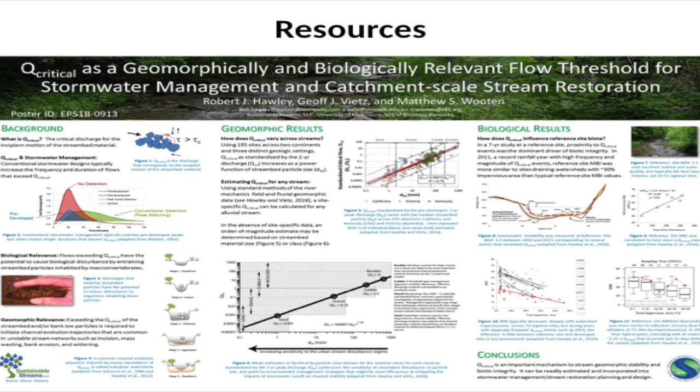So anyway, the meat of how you do it is described in those papers and so forth. But another resource is these, they call them infographics, but basically this is just a poster. This presentation is like 2 hours. This poster is kind of a summary of all the high points. So that's like an 11 by 17 that you could walk away with if you wanted it. So just shoot me an email if you're interested in something like that, or check out our website.

So to begin, conventional stormwater management and stream health. It's no surprise that when you take a forested watershed, and you take the trees away and replace them with houses and streets and such, when you look at the biological richness of the streams that drain those lands, they tend to be much different than the richness of streams in an undeveloped forested watershed.

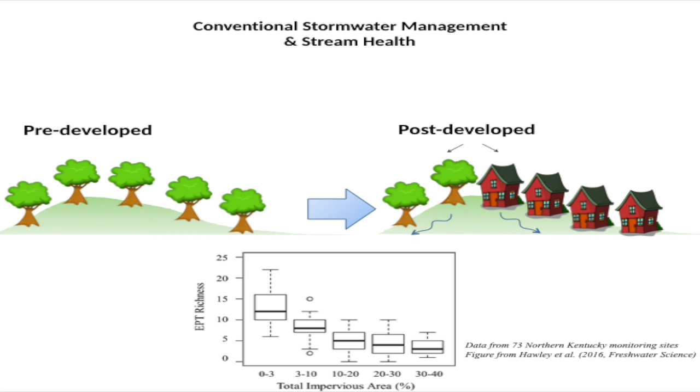And so these data are from Northern Kentucky, and I don't know if you'll be able to see this too well, but you see this shape, right? Kind of a steep drop off. So this is basically impervious area, and this is called EPT richness, but it's basically a measure of stream health. So this is the diversity of sensitive species in the stream. And basically, after you get 3% impervious, you go from having a mean of about 12 sensitive species of these groups, ranging from about 6 up to 22 or 23, right?

So a really nice range of diversity in these undeveloped watersheds, and you immediately drop lower once you go to 3 to 10% imperviousness. So 3% imperviousness is not very much. I mean, that's a few large lot scale developments in a big watershed. And Curry's Fork has a lot of watersheds and subwatersheds that are above that 3 to 10% range. They're definitely above the 0 to 3% range.

And then once you get above 10%, we kind of bottom out. And 10% imperviousness, again, is not very urban, right? It's pretty much suburban, and not even dense suburban. It's more like large lot size development. Very similar to the Oldham County development. And these data are from 73 sites all across a 3-county area in northern Kentucky, with a big range in imperviousness from 0 to 40% impervious.

But the key here is these streams have a variety of stormwater management in their watershed. So from basically no control, no stormwater controls other than just getting rid of the water, to pretty modern stormwater controls. So flood control detention, and even what's called water quality detention, so water quality volumes. And we still see this drop, right? So we don't necessarily see the stormwater controls that we're investing in actually protecting our streams and preserving the richness there. And this is not unique to Northern Kentucky.

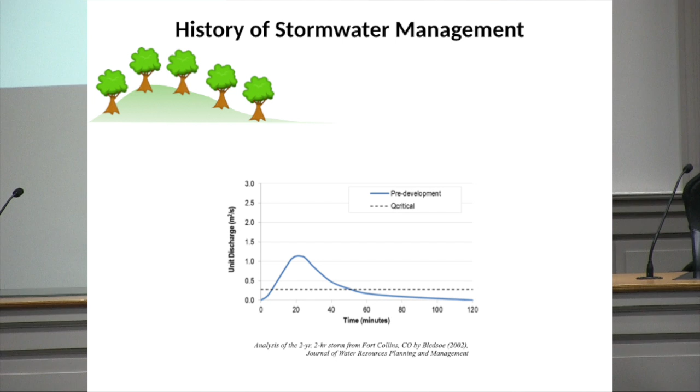So here's a hypothetical 2-year discharge from a 2-hour design storm. This is time on the horizontal axis, and the discharge of the flow on the vertical axis, and we'll call this the pre-developed flow regime. Under pre-1950s even to about the 1980s or so, the development approach was basically get rid of the water, right? So put some houses down, put some roads down, and get that water away from those houses and roads as quickly and efficiently as possible. Get it routed to the nearest stream, and we've got the water away from the people. We don't have mosquitoes and diseases and all those things.

Life is good, right? But what we know, even in areas with clay soil, like Oldham County and a lot of Kentucky and this whole Midwest region, subsurface soils are clay. They don't let a lot of infiltration through. But even that topsoil layer, and the trees with the interception storage in the leaves, that shallow infiltration, even that is a lot less runoff than pavement and rooftops.

And so you see a much larger volume of water and a much higher peak coming from the post-developed regime, right? And send that water downstream, and guess what? More water. Those streams had evolved over centuries to handle the flows they were typically used to, and we've just added a whole lot more water to them, and so we see a lot more flooding downstream, right? And engineers see that and they say that's bad, right?

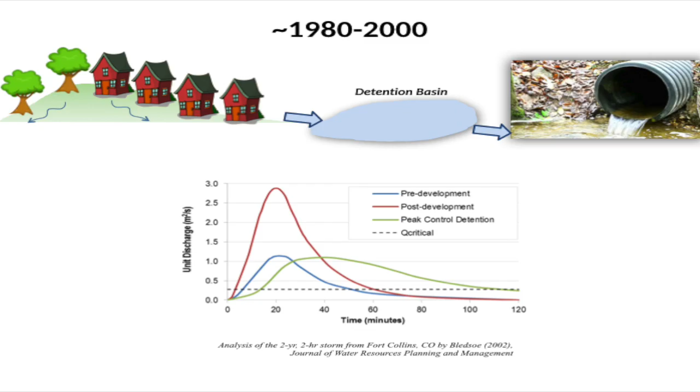And that wasn't a bad start. We don't want to make flooding worse, right? But what you see is we get a lot longer duration of flows that are pretty high. So under pre-developed conditions, the flow came up to this level, and then it went back down. And now we've got this long, drawn-out duration that, you know, it's a change, right? It is a change.

So what you notice if you ever see one of these conventional detention basins, and I do make my kids stand next to detention basins to take pictures. I'm like, hey guys, where's the water? Like it just rained, where's the water, right?

And the reason there's no water in this detention basin is because those detention basins really don't start to attenuate flow until you get to about the 2-year design storm. That's usually about the smallest flow that detention basins are designed to restrict, right? And so you end up with pretty large, what we call low flow pipes that release water from the basin. And those tend to be water comes in, water goes out, right?

And a lot of detention basins, especially in northern Kentucky, have even a concrete channel that connects the inflow to the outflow so that you don't have standing water in the grass. And long story short, what comes in, what goes out on most events in a typical year. And in northern Kentucky, the 2-year rainfall is 3 inches in 24 hours. 3 inches, like think about that. 3 inches is a lot of water, right? A quarter of a foot.

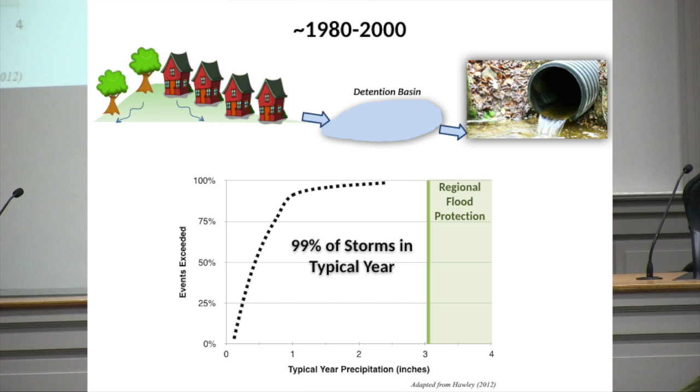And I think Oldham County, Louisville, it's maybe a little bit less than that, maybe like 2.9 or something. Don't quote me on that, but you can look it up. But northern Kentucky's fairly close to Louisville, Jefferson, and Oldham County. But anyway, 99% of the storms in a typical year, basically all the storms in a typical year, are less than that 2-year storm. That's just kind of by definition. The 2-year storm statistically happens once every 2 years. It has a 50% chance of happening any given year. So on a typical year, it's not going to happen.

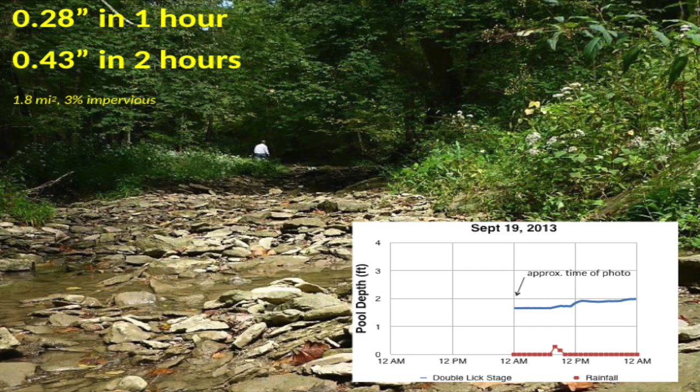And what that is, is the rain hitting the leaves, dripping down from the leaves, hitting the topsoil, soaking into the topsoil, hitting that clay subsurface, and then slowly making its way down to the valleys, right? So about 3 hours later, we get cool, clean water that's just a blip in the hydrograph, recharging base flows. That's what these critters that live in the stream are used to on a 0.3 inch event.

So pretty big difference if you lived along a stream all your life and somebody put a development in upstream, and this is what you see every 0.3 inch rainstorm, versus this is what you're used to, this is what you grew up with, right? So you can see where stakeholders that care about the stream or live next to the stream, have property next to the stream, might say this doesn't seem optimal, right? Can we do better?

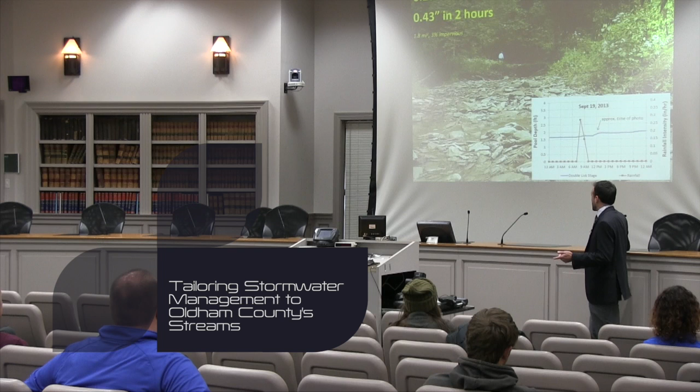The other thing about that first flush idea, about letting water just shoot right through your basin, so what goes in equals what goes out, is all the stuff that it carries, right? So, I personally don't fertilize. My neighbors fertilize. I don't hate them for doing it. You can have green grass. That's fine. I like to pick up after my dog. If you don't want to pick up after your dog and you want to step in it, that's fine too. People can do what they're going to do, but ultimately, if we don't have a way to manage and intercept those pollutants, they're going to end up in our streams. That's just a fact, right?

And a lot of the folks who've been around a long time have seen this. 15 or 20 years ago, we had a big push in Kentucky to get better sediment and erosion control on construction sites, right? And there was a big manual, lots of training, because everyone can say this is bad. Even if you don't particularly care about the streams downstream, no one likes to drive through that. No one likes to walk through that. There's a lot of reasons why stakeholders would say this is bad. It just looks bad, right?

And so we've been improving on our sediment and erosion control on construction sites. We're trying to avoid the milkshake water, as we call it, in our streams. But you can imagine if you're a stream critter and you're used to clean, cool water, and you're getting a bunch of milkshake water from sediment, or fertilizer that's kind of burny. If you're a fish, it might burn you. Or a lot of excess bacteria. If you like to swim in the stream, that's not good. So anyway, we said, that's also a problem.

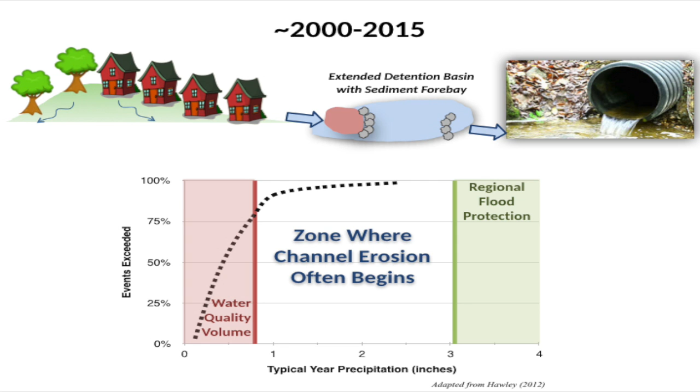So the problem is we've got this gap where above your water quality volume, below your regional flood control protection, stream erosion tends to occur. These sort of high flows that happen 2, 3, 4, 5, 6 times a year get pretty high, right? They didn't used to get super high, but without management, they get a lot higher, and they can contribute to stream erosion.

And so now is a good time to go back to the fundamentals of stream erosion. We call it the critical discharge or the critical flow for stream erosion. People have been studying this since the 50s, so we're going on 70 years of science in this. But basically, for any stream, there is a threshold where once you get to this flow, you're going to mobilize the particles on the bed, right?

If you were a bug that lived on that rock, that could be catastrophic. That could actually kill you, right? You could get crushed. At a minimum, you're going to let go of the rock and try to float away, let the water sweep you away, but that might kill you too. So for the bugs that live on those rocks, that's a big deal. For the fish that eat those bugs, that's a big deal, because that's happening more frequently than it used to.

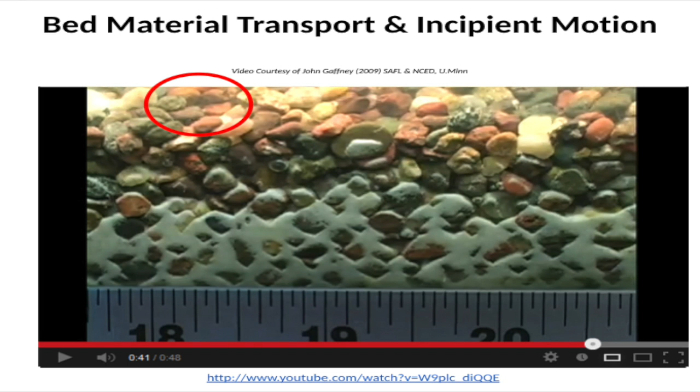But look at this spot right here. It used to have a rock that was up to about here, and now the surface of the rock is way down here, right? So the big deal geomorphically and stream stability wise is the stream just got deeper. By eroding these pebbles more than they used to be eroded, we're making our streams deeper, right?

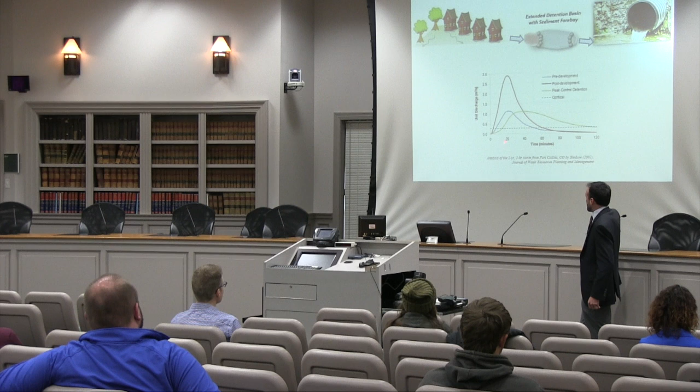And so what we've got with our conventional flood control design, again, this is the 2-year. This is a hydrograph in which the critical discharge is here, this dashed line. So you look at how much power is above the dashed line under the pre-developed conditions, and how much power is above the dashed line under the flood management conditions. And you see we got about 2 to 3 times as much damage being done on the stream than the stream was used to under pre-developed conditions, right?

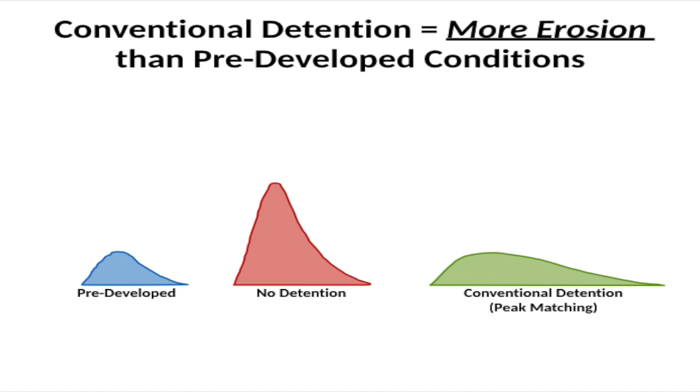So no detention was bad, but conventional detention prolongs that hammering of the stream, right? You got 2 to 3 times the power that lasts 2 to 3 times as long. You're going to erode about 2 to 3 times the rocks. So you do that over and over. Say you get a flow that mobilizes the particles, and then maybe a few of them get replaced, but then you do it over and over and over. All of a sudden, you're going to start getting deeper, right?

And that deepening causes a chain reaction of impacts in our streams, and we'll go to it in the next slide here. But basically, stream deepening and widening, property loss, tree loss, and then of course water quality impacts. So typically, as streams get deeper, they respond in this nature. And this sequence, we've measured it in labs over 50 years of research, but we've also seen this across basically the whole Midwest. This is how streams change when you either channelize them or put a bunch of urbanization upstream.

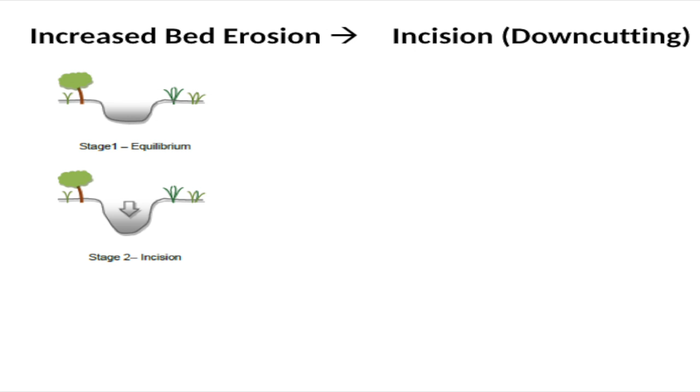And so first, you've eroded the particles that were on the bed right there, so you made your stream deeper. And when you made your stream deeper, that made the banks taller, right? Geotechnical engineering tells you that a taller stream bank, a steeper angle, makes the banks unstable. Geotechnically, they start falling in. So you enter the phase of mass wasting, where the bank is too steep and tall to actually hold itself up, and it fails by its own weight, right?

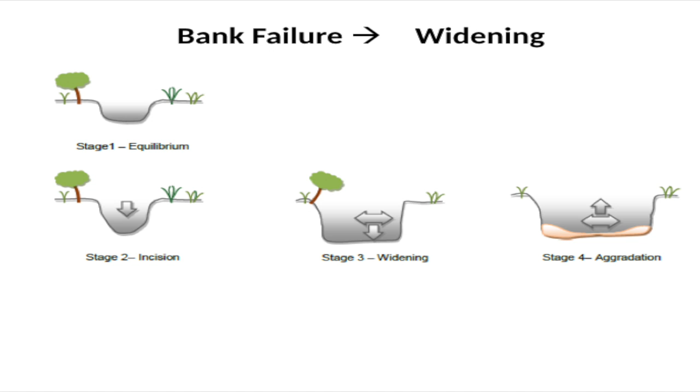So this bank is unstable, and you don't even need more flow to hit it. It can just fail due to gravity, right? And then over many, many years and decades, in most cases, you end up having this unstable bank, and it keeps widening until it gets so wide and so flat that you start to see deposition and aggradation at the toes of the banks, right?

So the stream has responded so much that it can no longer move its sediment on its bed, and it starts to aggrade. And then again, in many cases, years or decades, you see that aggradation become colonized by vegetation. And once you have colonization by vegetation, you start to strike a new balance. We call it equilibrium with the flow regime.

So the stream has become steep enough or shallow enough, or it has become coarse enough that it has been able to reach a new equilibrium with whatever you did to it. So whether that was channelize it, or whether it was add too much water to it, or whatever. And this process happens, again, throughout the Midwest.

And it's actually a really useful process when you're looking at a stream and trying to figure out, like, all right, there's a road right here, and it's in this stage of channel evolution. Well, that road's in big trouble, right? Because this bank is not going to fix itself. Whereas if you're in this stage and you're just starting to see incision in your roads over here, maybe you got a chance of heading that off.

But anyway, this is a kind of a tool that we use a lot when we're assessing a stream. The big point is this is a very predictable trajectory of channel change. Go ahead. What kind of time frame are we looking at from stage 1 to stage 5?

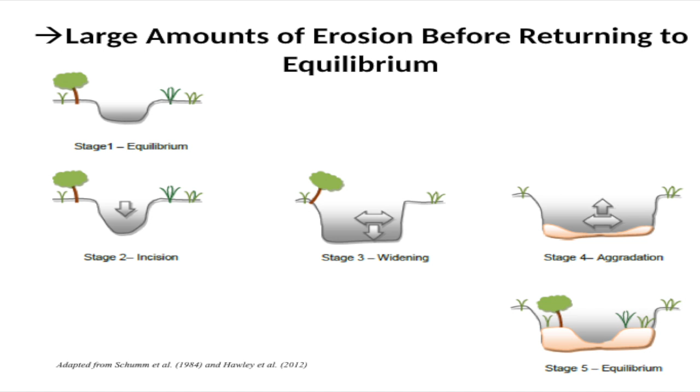That's a great question. So in our Northern Kentucky data, which is pretty similar to here, pretty sticky banks, right? You don't usually see every year you lose an inch of bank. Usually it happens in a big slump. So it could be like this for 3 years, 5 years, and all of a sudden you get a big slump, and you lose like 3 or 5 feet in 1 year.

So we just did a memo for SD1 on this that looked at all their sites over about a decade of monitoring, and their average rates of widening were about 4 feet per decade. So about 0.4 feet per year on average. But again, you don't usually lose 0.4 feet exactly every year. It's more like in a 5-year period, you might lose 2 feet or even 4 feet.

But the range of variability was pretty big. So the average was about 4 feet per decade. But you could go from basically 0 up to like 10 or even 15 feet in a decade, right? So it's a pretty big range.

And then as far as deepening rates, they were more like, I want to say, on the order of about 1 foot per decade or something like that, about 0.1 feet per year. I can send you the actual paper and get the exact rate right. But the bigger point is, this tends to be a long process, right? You need the flows to happen, and these geotechnical failures are unpredictable, and so it tends to be on the scale of decades to working itself out rather than years.

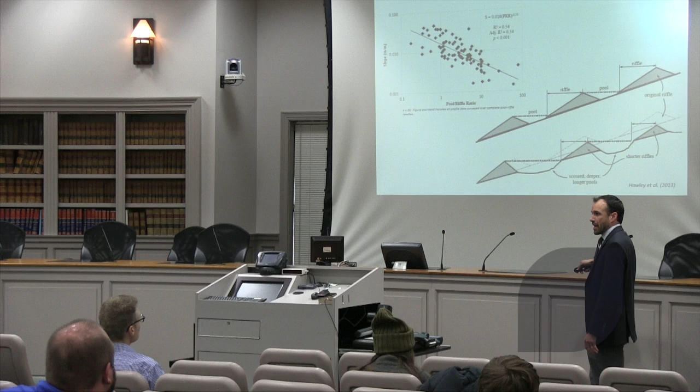So that was a cross-section view, like you're standing in the stream, but this is a profile view, looking at the stream from the side. The point here is, when streams get flatter, they also impact their habitat. So you're not only getting deeper, but if you're dropping less elevation over the same distance, you actually have less room for riffles. And riffles are the shallow, fast flow areas that you see in a stream where the water's kind of ripply.

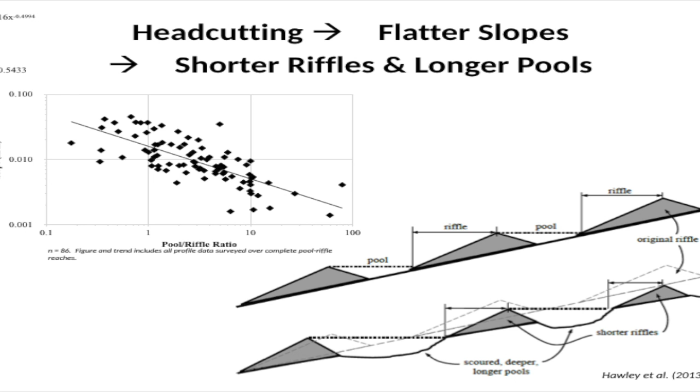And the reason that's important is there's a lot of taxa that evolved to live in those riffles, right? If you've got a nice diverse stream, you've got some species that like pools, and some species that like riffles. And if you've got less and less riffles, then you're going to have less and less of those sensitive species that like the riffle habitats, which is another indicator of poor biological health. So just by the nature of eroding all the pebbles that can form the riffles, you're losing your riffles.

And then, of course, bank erosion. Nobody likes that. That's what we were just talking about. This is eating up a fence. Lots of sediment coming off this bank. And this stream has eroded through bedrock. We have a lot of streams on bedrock here in Oldham County. And the problem with streams on bedrock is once the bedrock is exposed, it actually weathers a lot quicker than if it had a layer of pebbles on top of it, right?

So as you have exposed bedrock, that starts to weather, and then if you eat through that layer of bedrock, a lot of times what's beneath our limestone is another 4 or 5 feet of shale. So then you can go from having a pretty shallow stream with decent connection to the floodplain to, all of a sudden, 5 feet deeper, in a matter of decades rather than centuries. So that's not a good process either.

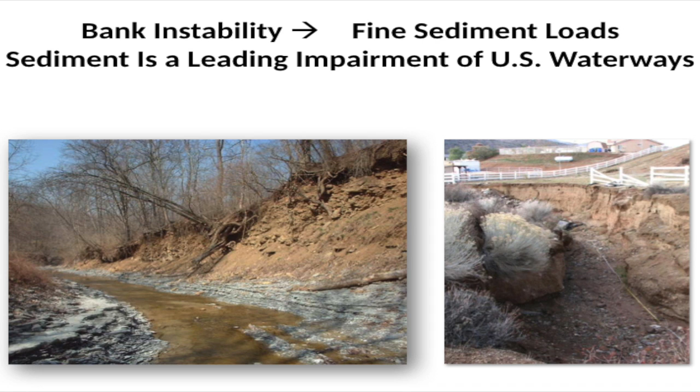But in terms of water quality and Division of Water's interest and Congress's interest, sediment is a leading cause of impairment in our nation's streams. It's actually the leading cause of impairment in, I want to say, Kentucky and Ohio. If it's not the first, it's the second. Usually sediment and bacteria are right up there. And we know from intuition, that's a lot of sediment, right? But we also know from a lot of data that a lot of the sediment in our waterways comes from bank erosion.

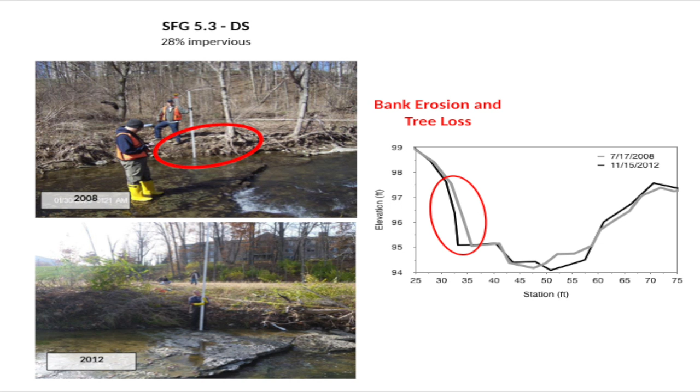But this 3 feet of erosion at that stream, and all the other rates of erosion we measured at our other sites, if you project that out in terms of a load, what you end up with is that the amount of erosion we've seen at our stream banks explains 100% or more of the sediment in our water.

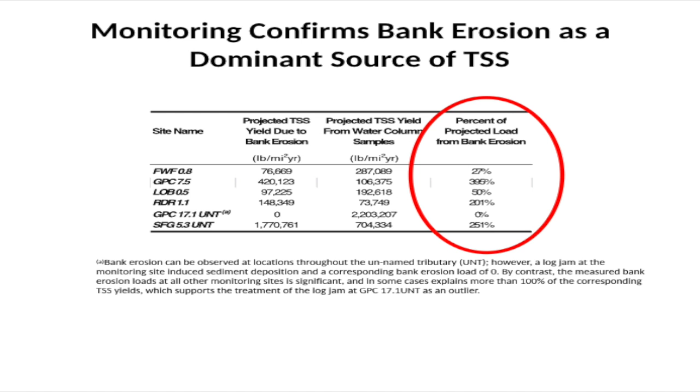The sediment that we measured in our water, we've got 100% of that can be explained by just bank erosion. It's not to say that that's the only source of sediment in our water, but it's saying bank erosion is so high that all of the water column sediment could be explained by bank erosion. We probably have some construction site runoff, some coming from that. We probably have some other sources, but in general, our bank erosion rates are high enough to explain a lot of the sediment in our water. Number 1 pollutant in our streams.

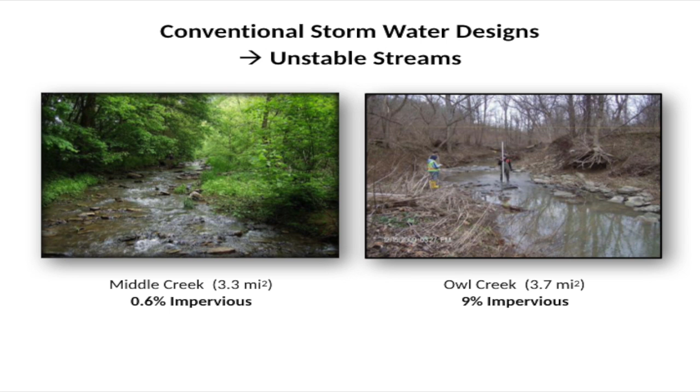So here we go. This is kind of a picture speaks 1,000 words thing. Two watersheds, similar sizes. This is a reference site with very little impervious area, less than 1%. Here's a lightly developed watershed with 9% impervious. And you can see the difference. And just so you know, I'm not cherry picking because this is a nice summer picture and this is a terrible winter picture with no vegetation. You can imagine this tree didn't choose to grow like this, right? There used to be a bank here, or the bed used to be a lot shallower, because those roots didn't choose to be exposed, right?

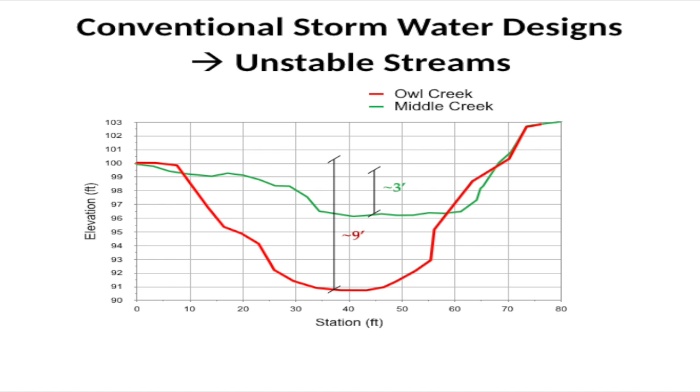So here's their actual cross sections, right? About 3 feet to the floodplain for Middle Creek, about 9 feet to the floodplain for Owl Creek. 1% impervious versus 9% impervious. So those are real differences, right? Unstable streams impact resources and waste money, again, impacting property. Lots of infrastructure along these stream valleys, right? So lots of sewers end up getting exposed.

So, we all drive on roads, right? Unstable streams are not good for roads, right? So the point is, the conventional management is pretty unsustainable for not only our streams, but also our infrastructure and our societies. So how can we optimize that to be a lot better, right?

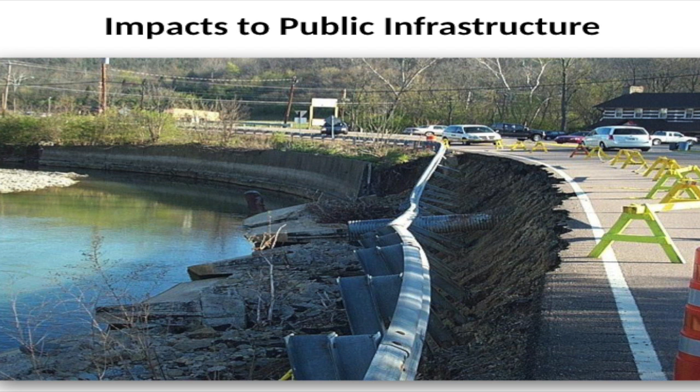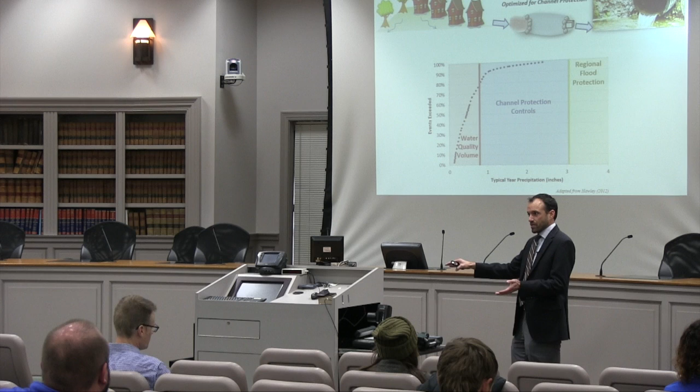And so the future of stormwater management, not only here but across the globe, is really paying attention to your stream to figure out what flows erode your streams and making sure that post-development you're not making that worse, right? And so you figure out what that critical discharge is for your stream or your region, and you make sure that each storm that exceeds that, you're not exceeding it at a larger peak or duration than was happening under pre-developed conditions.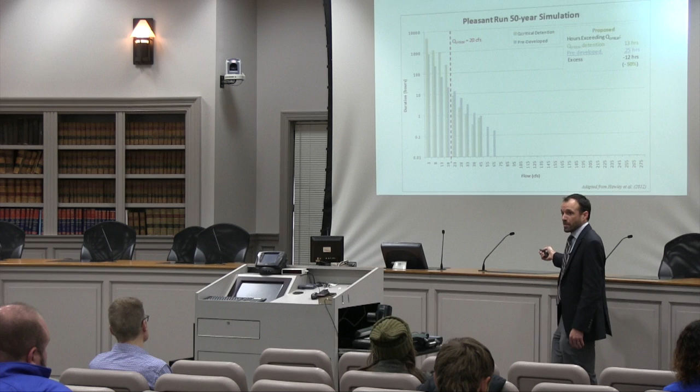So we're still exceeding Q critical. See, the green bars still exceed. We still have a few minutes at 38 CFS, but it's not more than an hour at 38 CFS over that 50-year period. Same for all these other flows that exceeded Q critical, right? So that's the idea that Q critical gives you, we call it the safe release rate. And if you can do that over a 50-year simulation, 20-year simulation, over the long term, you're not going to have any more damage, any more erosive power in the stream after development than happened before development.

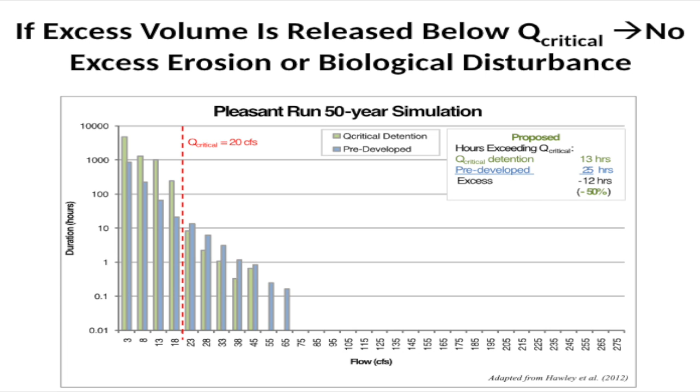So if Q critical is that important, obviously, we got to figure out what it is, and it's clearly not one size fits all. Right, and again, we've been studying this for about 70 years. But again, you can just use your intuition. I mean, the flow that erodes a boulder is much different from a flow that erodes a cobble or a gravel or sand, right? And so here's a particle diameter on the horizontal, and then the depth to mobilize that particle if you're in a stream. And these are different slopes, right? So let's just look at 1% slope, right?

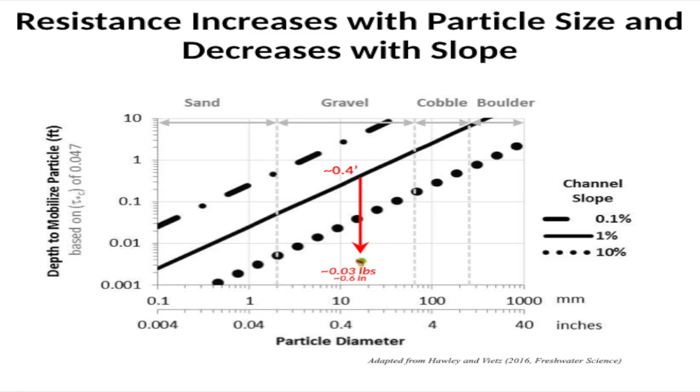1% slope. If you have a marble, let's see, I got my prop here. Marble this big, right, on a 1% slope, so you're falling 1 foot over 100 feet, right? You only need about a half a foot of depth to mobilize this marble, right? All right, so not a big flow, right? If you have a golf ball, so if the golf ball was a rock, we're still in the gravel range, it'd be about 0.3 pounds, and you would need about a foot of depth to erode stream particles like this on a 1% slope.

I'm going to trip on that.

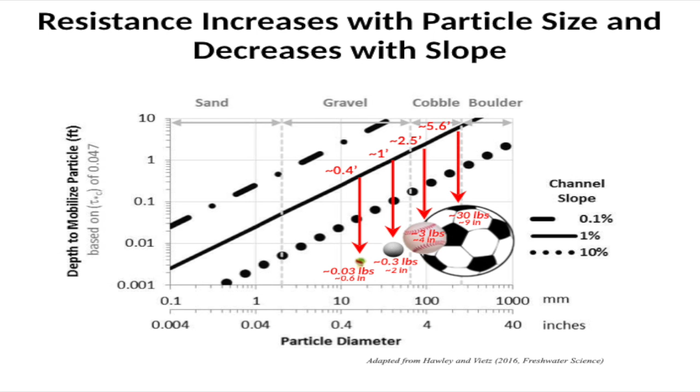If you had a softball, so I mean, we're getting bigger now. We're in the cobble range, right? This is 2.5 feet, so we're getting deeper to erode this on a 1% slope. And then if you are a soccer ball, much bigger, right? 30-pound rock, right? On a 1% slope, you got to be basically as deep as me, right? You're nearly 6 feet of depth to erode particles this large, about 30 pounds, if it was a rock, right? On a 1% slope. So again, this is stuff that we've been measuring in a lab for 70 years.

It makes intuitive sense, but it matters how big your particles are at your stream sites. We've been studying this in Northern Kentucky for a decade or so, and it takes basically counting the rocks and measuring the particle sizes on the stream bed to figure out how big they are, how heavy they are, what's the flow that's going to cause erosion.

And you typically need to do this at a lot of sites, and particularly the sites that are not developed, your more reference sites, to figure out what is that Q critical for the regionally representative pre-development target that you'd like to have.

And one more thing for the biologists and ecologists in the room. So I've been talking a lot about stream erosion and engineering and river mechanics, but Q critical is even important at our reference sites. And you can see that not only in the geometry of the stream, but in the bugs. So here's a reference site with perfect habitat, perfect water quality, great undeveloped flow regime. It's forested and hayfields upstream.

There's no development upstream. And in 2011, we saw 4 events that exceeded Q critical, right? And normally we get like 1 event that exceeds Q critical in a year. And so our cross section got about 30% bigger between 2010 and 2011. And our bugs went from basically excellent to poor, right? These are all measures of biological health, and here's our 7 years of data at this site.

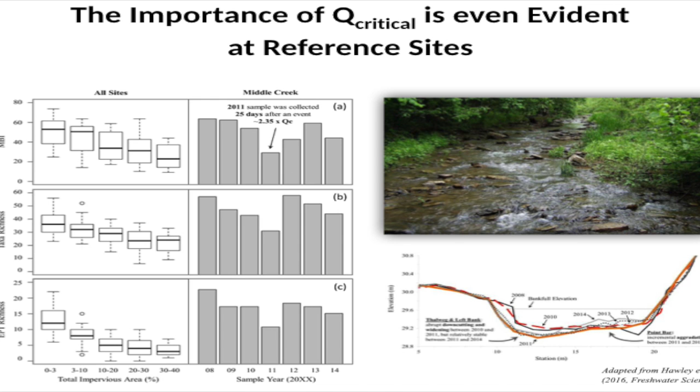The difference is, at a developed site, you're getting hammered every year if it's conventional management, whereas at the reference site, we bounce back immediately. The bugs bounce back when the weather goes back to normal, and that's a dangerous phrase these days, but when the storms were less erosive the next year, we saw recovery in the bed, and we see recovery in the bugs. So here's another way to look at it.

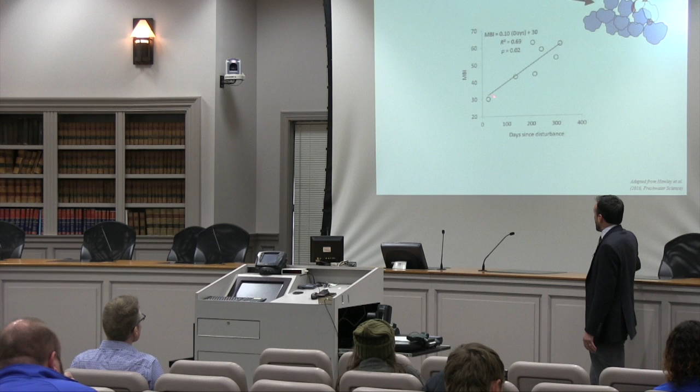This is basically stream health versus the number of days since a Q critical disturbance event. And you see here in 2011, we had a disturbance event really close to the sample date. Our bugs were terrible. And the more days you have to recover, the more days for the rocks to be stable and be recolonized by the bugs that are still there, the better the biological health is. So increasing biotic integrity versus increasing recovery time.

It's the same for channel enlargement or geomorphic recovery. So the closer you are to a Q critical event, the more channel enlargement you see, the more difference you have between last year's survey and this year's survey.

But the further out you are from a Q critical event, the more time that channel has to recover on its own, using vegetation, the roots, to restabilize and things like that. Go ahead. Are you saying on that undisturbed stream, that was all a natural occurrence? That's right. It was just the weather.

Yeah, so we have a whole paper about it that kind of shows you it was 4 events that exceeded the critical discharge, and one of them was, I want to say, 2.5 times the critical discharge. So those were more frequent and larger Q critical events, but they were not affected by development. Let's say that. It was the weather doing it, not anything else. There were no other factors.

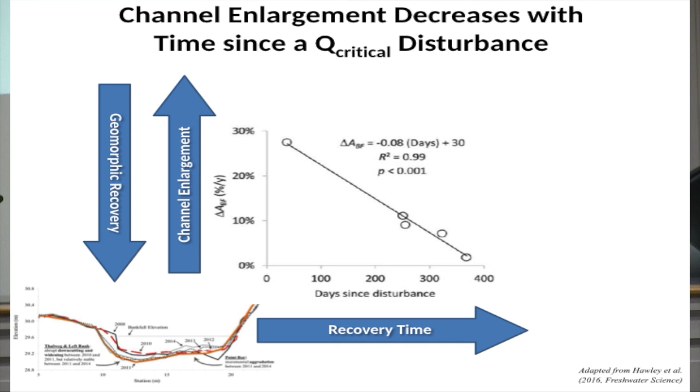So are you trying to prevent what normally would happen there, or are you just using that as a base? That's exactly. So under normal conditions, if your stream has erosion sometimes, naturally, then the bugs that live there and the fish that live there depend on that. They just depend on it to be that natural frequency, right?

And so when we disturb them too frequently, we kind of end up in that cycle of channel evolution where instead of restabilizing, the rocks filling in from other rocks, the vegetation colonizing bare spots, the bugs coming back, because we've had a lot of days between disturbance events. If you disturb them 3, 4, 6 times a year instead of maybe once a year, then you start down this cycle of degradation that ends up lasting a long time. Go ahead.

Can you just talk a little bit more about the recovery and what all goes into that? Like the channel eroding, for example. What occurs during recovery to make that go back to something close to what it used to be? Yeah. So what you see here in the red line is 2010 and the orange line is 2011. So that got deeper, right? And it got deeper across, mainly on this side, right?

But over time, 2012, 2013, 2014, you see this bar building over here, and that bar is getting colonized by vegetation. And basically, if you measure what we call the bankfull area, how big the channel is below the top of the bank, roughly, the area of the 2014 channel is within about 10% of the area of the 2010 channel, the pre-disturbance channel. So incrementally, it's recovering to what it was, because what it was was an equilibrium.

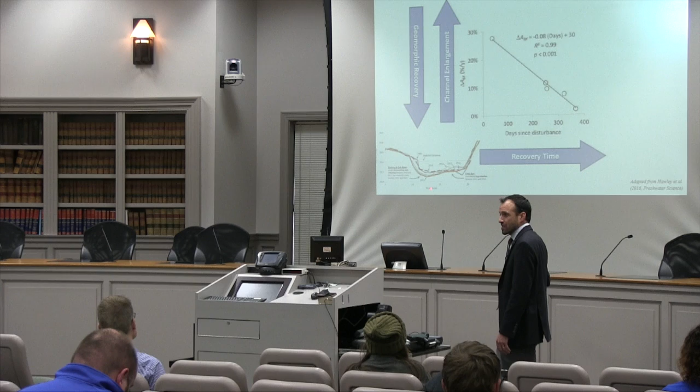In a disturbed watershed with frequent disturbance, you don't have that time for vegetation to colonize this deposition, right? You've got too much energy, so the stream is trying to dissipate that energy by making itself flatter and making it wider. And that's that long process of channel evolution.

Question also. Those 4 storm events you're talking about, what kind of event are we talking about? Is it measured as a 2-year storm, 10-year, something, so you can put it relative to what we're designing to? Right. So you see, this is excellent. This was good. In 2010 it's a little bit worse than 2009 and 2008, and then this is 2011, which was a 40-year event. 2010 wasn't a 40-year event, but it definitely exceeded Q critical, right?

And so the best way to think about this, see this scatter year to year, right? We have lots of sites in the 0 to 3% category here. They're all lumped here. And you see, any given year, we've got a lot of scatter. It could be really great, like here, or it could even be poor. But over time, that reference site is going to be the best that you have.

And so whenever you're doing a sampling program, it's really important to always sample a reference site, because you could be measuring just a bad year, just a bad rainfall year. It could have been a drought that disturbed it. It could have been a Q critical event or whatever. But the reference sites in Northern Kentucky, again, best of the best, these things bounce around from excellent to poor.

But what's interesting, so this is MBI, which is kind of a big aggregate metric of a lot of things that they're measuring in the bug community. But this is taxa richness, and what that is basically diversity. So how many different species you have at that site. And what you see is the year after the record disturbance was our richest year.

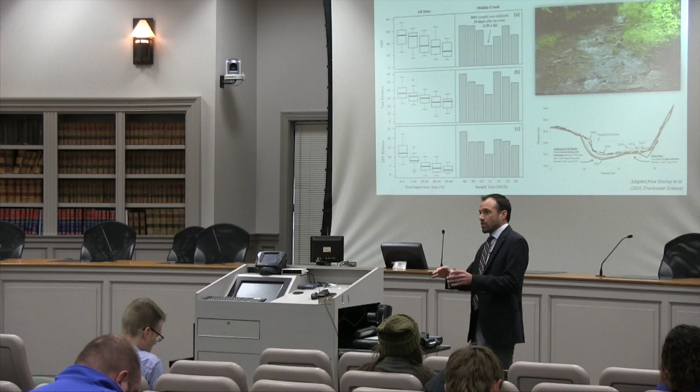We actually need those disturbances occasionally to sort of reset the system, because what happens is if you don't disturb the system for too long, all the weedy species get outcompeted by the longer-lived, more competitive species, right? And they start to kind of knock down your diversity. If you disturb it too frequently, all you have is the weedy species, and those species that take a long time to get colonized, they're not there, right?

And so you get your greatest diversity when you've got that natural mix of infrequent but frequent enough disturbance, basically the natural disturbance regime. And so we're not trying to release all storms below Q critical. We're just trying to not do it more than it happened under pre-developed conditions. And generally, conventional development releases it way more frequently than under pre-developed conditions.

But yeah, all the biologists that I talk to, they get worried about this policy because they're like, well, you're going to over-control. I'm like, guys, if we ever over-control, then let's have that conversation. But we're pretty far away from over-controlling at this point. So anyway, that's a great question.

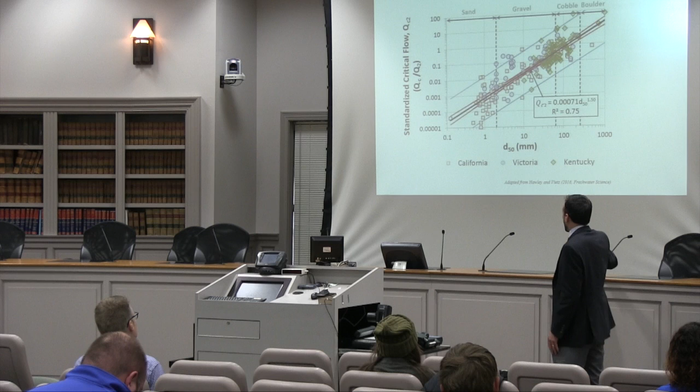So these are data from California, Victoria, Australia, and Kentucky. And what you see is when you take the Q critical for a site and you standardize it by the undeveloped 2-year discharge, you get a really nice relationship across bed material size. The problem is this is a log scale and there's basically 3 orders of magnitude in the scatter, right? And so you really do need to kind of calibrate it to your stream, or at least your region.

And California has got a huge spread. Like these red dots go from basically always disturbed every time it flows to something like 10% of the 2-year discharge, or even 100% of the 2-year discharge.

But in northern Kentucky, our reference sites are telling us that the Q critical value is about 40% of the 2-year discharge. So the gravels and cobbles in our streams in northern Kentucky can hold up to a pretty big flow. Like 40% of the 2-year discharge is, you don't really want to stand in a flow that's big because it might knock you over, right? So we've got some pretty resistant streams in northern Kentucky.

People have used these types of data to sort of come up with regional Q critical targets for their region. So Santa Clara, California was the first to do this. Their systems are a lot sandier. They're more sensitive, so their Q critical was 10% of 2-year discharge. San Diego has classes depending on what kind of stream you're in. So you can be 10, 30, or 50% of the 2-year discharge, depending on if you have a more resistant stream or a less resistant stream. And in northern Kentucky, we have about 40% of the 2-year discharge.

And interestingly, even in bedrock streams in northern Kentucky, what we see is the threshold to basically erode the vegetation at the toes of the bank and on the bars also tends to coincide with that 40% value. So even if our pebbles aren't there, our rates of enlargement still coincide with this 40% of the 2-year discharge threshold. So it's kind of applicable and a good target for lots of different stream settings in northern Kentucky. And in order to try to induce that deposition, keep that deposition stable long enough for the vegetation to colonize it.

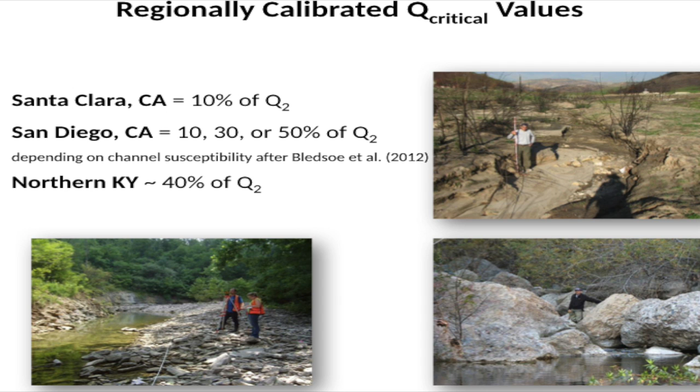There are also stream-specific requirements. So these regional requirements are just saying, here's the development manual, and here's your target, right? And you don't have to go out and actually do anything at your stream. But there are some states and municipalities where they do stream-specific requirements. So New York State requires that on projects draining greater than 50 acres with more than 25% impervious, you basically hire someone like me and they go out and do an assessment of the stream, figure out what that Q critical is, and then tailor the management on each single development, right?

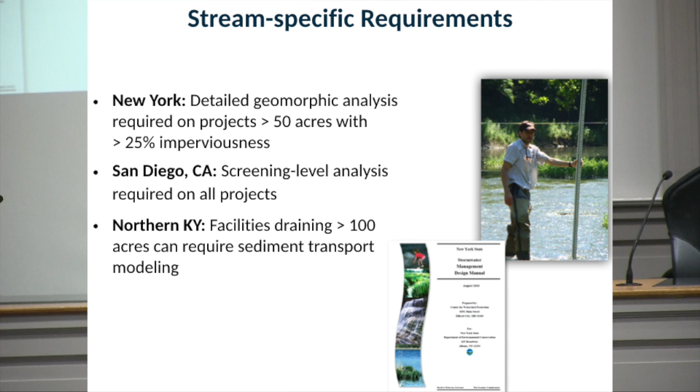San Diego, California has that screening level analysis required in all projects. Some of your more sensitive streams end up requiring some extra analysis. In Northern Kentucky, all it is, if you've got a facility that drains more than 100 acres, you need to probably talk to Northern Kentucky SD1 and basically they'll work with you to figure out what kind of potentially extra modeling might need to be required. But in general, the large majority of development sites do not have facilities draining larger than 100 acres, so they just kind of use that standard 40% value.

So we do all this extra sediment transport modeling on the municipality side, on the research side, to figure out how we can optimize our stormwater rules and regs in the simplest way possible and still get what we want in terms of no extra erosion in the stream, right? And so we use these continuous sediment transport analyses. So this is a top 20 event, so it's the largest 20 storms in the last 20 years.

And what we show, just as an example, is the difference in sediment transport to the pre-developed regime. Under no detention, but post-developed, we've got about 1,000% worse than pre-developed conditions. For flood control detention, we've got about 300% more sediment erosion than under pre-developed. For flood control and water quality, we're still at about 200% worse. But if we add this channel protection control, we're basically right on the money. We're minus 11% relative to the pre-developed conditions.

Go ahead. Is there any differentiation between surface detention and underground detention in the downstream effects? There's definitely potential for site-specific differences and effects on that level of detail. In terms of the sediment transport though, if an underground detention has the exact same hydrograph being released as a surface detention, the rocks don't care, right? Now if it's cooler water or whatever, the nuances of the different facilities can make some differences, but in general, in terms of sediment transport, there's no difference if the hydrograph between one approach and the other is exactly the same.

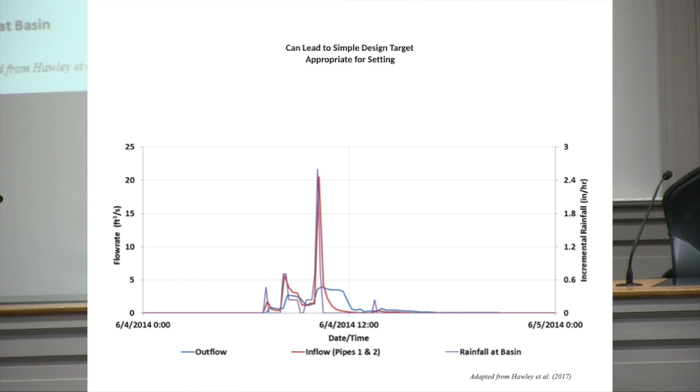So that's pretty simple, there's no extra modeling there. You don't have to hire someone like me and do sediment transport modeling. You don't have to do more design storms than you already did because you're already doing the 2-year event, right? You just have a new design target for your release rate. So we're lucky because Northern Kentucky has some resistance in it. Oldham County probably has some resistance as well. If you're out in California where the streams are much sandier with smaller gravels, you do need the continuous simulation to make sure you're not exacerbating erosion.

But here we're able to say if you design to this for the 2-year event and you meet your water quality volume and your flood control volume, no matter what BMP you use, you're not going to make the erosive power of the flow regime worse than it was under pre-developed conditions. You just can't do it. You can't make it worse if you meet these pretty simple criteria.

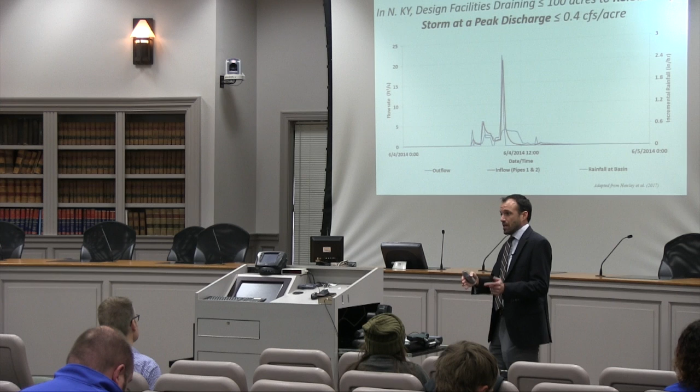Now on those facilities draining larger than 100 acres, it can get pretty difficult to meet this 0.4 CFS per acre criteria. So if you want to, you can use continuous sediment transport modeling to figure out, can I release it a little bit differently and still meet the intent of the rule? So the exception to the rule might make your facility a little smaller, but it's going to be more design time, right? So that's the trade-off.

So for about 2 years, SD1 did things like this at their annual trainings to all their developers and contractors and engineers, just talking about how erosion control on sites is doing, and general trainings and things like that.

And they rolled this idea into these trainings, and then they started it with a credit policy. They said, this new Q critical policy is coming, but we're not going to require it yet. We got a year to get used to it. And if you happen to meet it for this first year, you can get a credit on your stormwater fee, right? And then after this 1 year of training and knowing about it, we're going to require it on every project, right?

And so all it was was a simple letter. They didn't even change their rules and regs. It was just a change in the design target within the rules and regs, so they didn't even have to open the rules and regs up to do this. Basically, they issued a front and back letter to everyone that said, here's our new design target. And again, here's what they used to have to do: the water quality volume, 0.8 inches, the 2-year, 10-year, 25, 50, 100. No changes for all these other flows and events that they have to do.

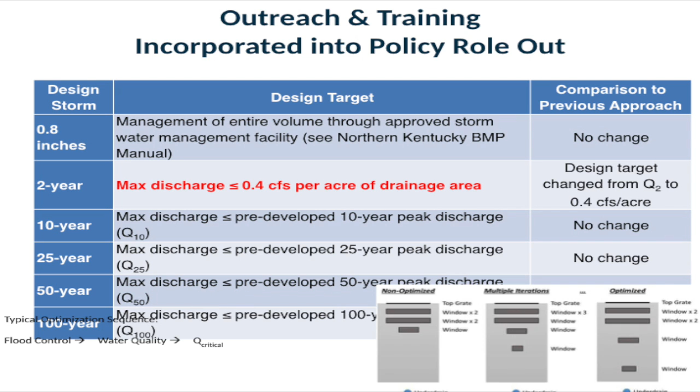And then the 2-year, instead of releasing it at what the pre-developed 2-year was, you've got to release it at 0.4 CFS per acre, which is basically 40% of that pre-developed 2-year flow. So you had one change in design target, and that's it, right? From here, it was all about how do you do it, training, right? We're not asking for more storms, but do I design my flood control basin and just make the basin bigger to meet this Q critical requirement? So then we had to walk folks through how you optimize this.

But again, the implementation goal is: our current trajectory is you take an undeveloped stream like this, you put development in, you invest a lot of money in your stormwater controls, and you still end up with this, right? We're trying to break that. So we're trying to prevent future problems by optimizing our stormwater controls on new development, right?

And then on streams that already look like this, that have already had development, we're trying to mitigate these problems by finding cost-effective retrofits and other stormwater interventions in the watershed to hold back more water, release it in ways that don't cause erosion, and start to see recovery, okay? So we're going to give you some examples of this and then conclude with an example of this. So the first is a bioretention basin.

Something like this. Again, it's basically just a nice looking detention basin. I know the green engineers would say, no, it's this, this, and this. I mean, you're trying to get infiltration into the ground. You're trying to cool the water, release it, mitigate the temperature regime. You're also trying to get better water quality treatment with the subsurface chemistry that goes on. But in general, it's still a hole in the ground, and it's still taking up the same size lot that you were going to lose with the detention basin, right?

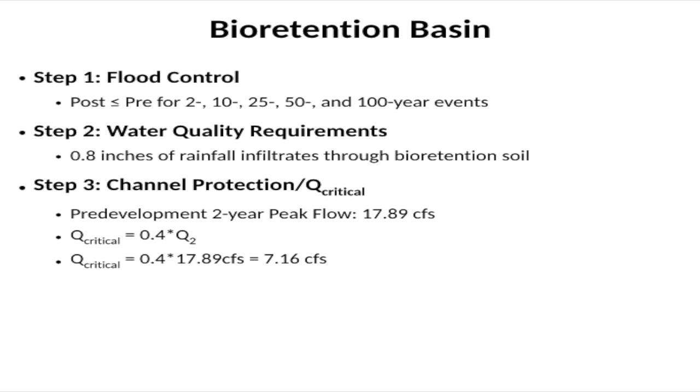Basically, you can't have an open window above or below the depth of ponding that the 0.8 inch event will produce, right? And then step three is, what's that 2-year storm doing? Let's make sure we're not releasing it at greater than 0.4 times the undeveloped Q2. So in this example, the undeveloped Q2 was about 18 CFS, 0.4 times that is about 7 CFS, okay?

So what we were seeing when we first rolled this out was that folks would do it, they'd get a traditional detention basin, about 4,000 square feet and about 2,500 cubic yards, and then they add the water quality and they can make the basin even a little smaller with bioretention in terms of the footprint. They made it a little larger in terms of the excavation, but pretty much the same size as flood control. And they were already doing the water quality BMP, by the way. But then when you added Q critical, to meet that 2-year requirement, the basins were getting larger.

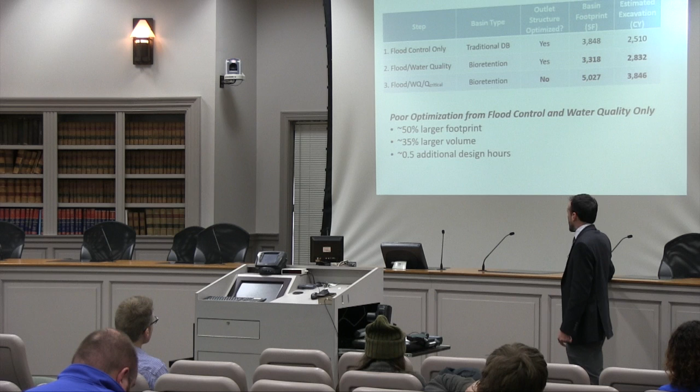So they were getting larger in footprint and larger in excavation. And what we realized was that folks weren't really optimizing their outlets to meet that Q critical requirement. They were just making the basin larger to meet that requirement. And so what we showed them with a lot of workshops that had some step-by-step examples was, look, you can use the exact same bioretention basin that you were going to do with your water quality, and if you optimize the windows, you have the exact same size. And it just took about 2 additional design hours.

And so here's an example. Here's what we mean by that. So this is basically a big box that is regulating the release of water, right? And at the underground, we call it the underdrain, that's your water quality volume release. Up here, the top grate and these windows, those are letting out the big flows, like the 100-year flows, right? And then where do you put this window in order to meet that Q critical requirement?

And so you do multiple iterations, right? You go from 2 windows up here to 3 windows up here, maybe a window lower, and then eventually you land on, here's a window, there's another window, and then two windows up here. And that pretty simple optimization, about 2 hours of design time, meets our Q critical criteria and gets us at our goal. So basically, this ponding level is still above the 0.8 inch event, right?

So all those first flush volumes are still going through the underdrain, but then we start letting out water in a small window that is not exceeding Q critical, and then we don't let it get to this second window until it's larger than the 2-year event in this case. Now in other cases, you might still go through the underdrain for the 2-year event. It's all different in each case, right? But that's the idea of optimizing. You're not making the basin bigger, you're just figuring out how to release it with these different window configurations.

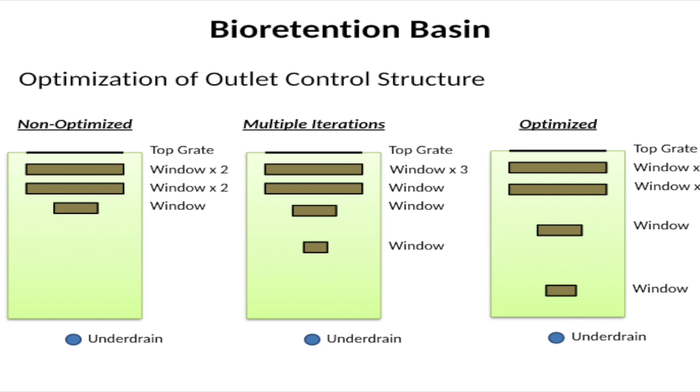So did this go into the new design standards for the SD1 area? Yeah, so basically, all they did was issue a letter that says, here's the new design target, and to get your permit, you have to meet this criteria. Now, they are in the process of updating their rules and regs to do a whole lot of other things, and this will go into that officially, but it's already implemented because a lot of people have in their rules and regs the ability to change it based on new information, right?

And so, when I mentioned the study about the roads falling into the creek and like $3 million in damages in 1 year to state roads, well, for SD1, about 10 times less than that number, so about $300,000 per year, is being in impacts to their sewer lines based on unstable streams. And they've got 3 counties and a lot more people than Oldham County, but still, that's a lot. Those are real impacts to their infrastructure based on instability that they could prevent or at least reduce by better stormwater management.

So in SD1's opinion, it's in their best interest, not only from a regulatory standpoint and keeping their streams healthier, but also financially protecting their infrastructure, right? I mean, exposed sewers and exposed manholes from stream erosion cost money to fix. And so they're looking at this from multiple angles. But yeah, it's required now.

Okay, so for those who may not be familiar, that's Sanitation District 1? That's right. How many districts are up there in Northern Kentucky? They're the only one, I don't know why they have the number 1 in their name, but they're the sanitary and stormwater utility for the 3-county region. Now, I think Florence has its own stormwater, but maybe SD1 does their sanitary. I'm not exactly sure. Not every single community is in SD1, but almost. I ran into that on a project up there.

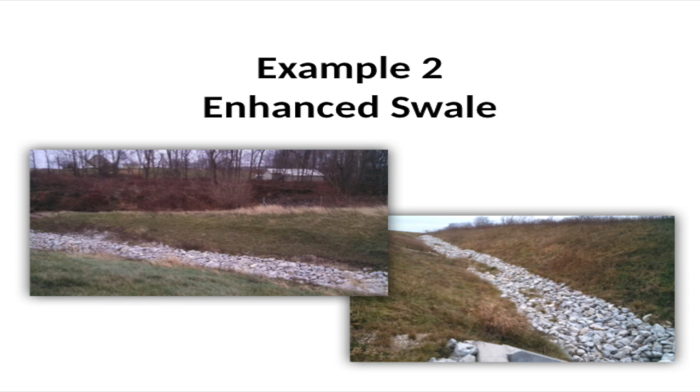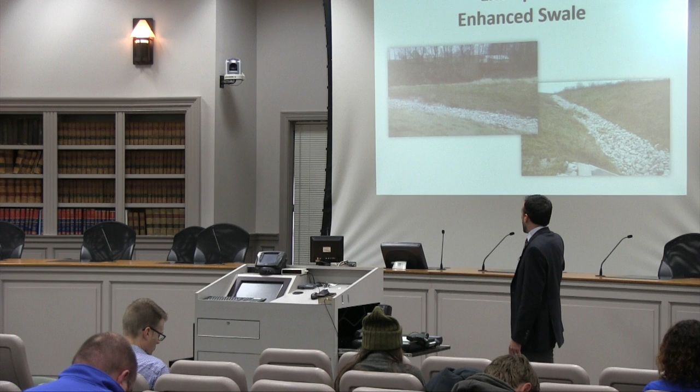it's all good. We did do a case study example of enhanced swales because some sites don't have room for a big basin, and particularly KYTC, they don't want a lot of ponding next to their roads necessarily. They also don't have room for big ponds. So can you do something better in a linear way? And so what we used, we got this from Illinois DOT. They've been doing enhanced swales.

So basically, every single highway in Kentucky, unless you're in a really urban area, has a swale down the median and on the sides, right? And instead of a grass swale, it's a swale with gravel on the bottom. If you're on a steep slope, you probably need riprap. If you're on a flat slope, you can just use small gravel. But basically, instead of getting to the bottom and then shooting down slope, you're infiltrating into this gravel, slowing the water down because water can't flow through gravel as quickly. And in doing that, it's not a big change to the design. You already have aggregate on site for your highway projects, right?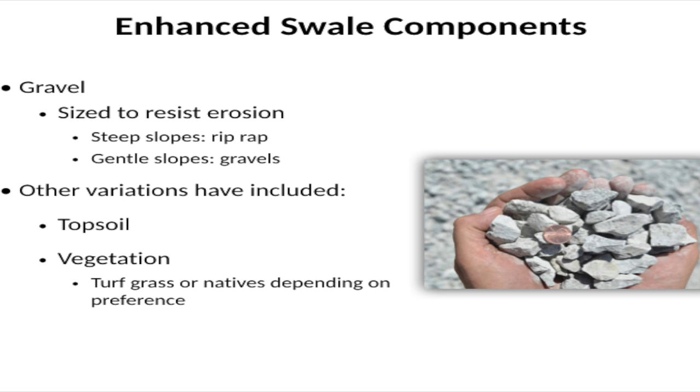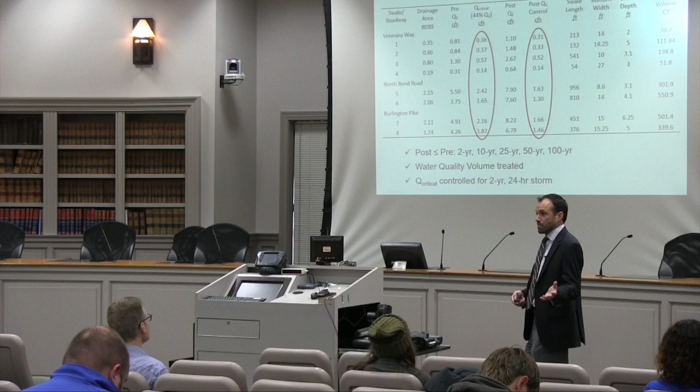And what we were able to do is size these swales to meet the Q critical requirement and still meet the flow control requirement and the water quality volume requirement. And basically go from not meeting any of the goals of the Clean Water Act to meeting all the goals of the Clean Water Act with just a tweak to the design of what they're already doing. They're already doing conventional ditches, so if you just amend the swales, it adds very little cost to the project. Relative to a conventional ditch, it's about 6% more. Relative to a curb and gutter and pipe, it actually saves money to use these swales. And to replace the pipe only and keep the curb, it's about 3% more than what was already going in. And again, most of these facilities weren't meeting even flood control criteria before. So here's a pretty simple, cost-effective way to do this along roadways.

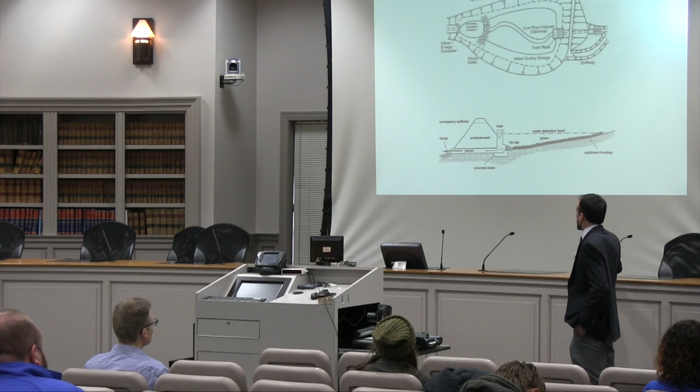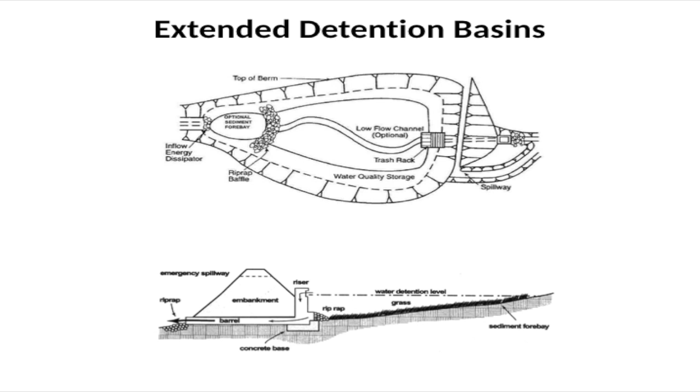Example 3, an extended detention basin. You got a basin, you put a forebay in it, and then at the downstream release, you got an outlet protected by rock that's forcing the first flush to go through rock here and then through rock again, to make sure you're meeting that water quality criteria. And again, the two-year flow pre-development is about 18 CFS. No control is 39 CFS. The post-control without the Q critical criteria, just meeting flood control, is 15, but we can do the same exact basin, just tweak the outlet and meet our Q critical, which is 7, same size, and it took Nora about 45 minutes to do this.

Now, Nora is a machine. She's awesome. She's been doing this a long time, so it's not going to take everybody exactly 45 minutes, but the more you do it, the quicker it gets. So in general, a little bit more design time to optimize the outlet, and you can comply with this, but it's not another storm you have to run. It's not continuous simulation. It's not a new model you have to buy. It's pretty simple.

So my last example is, you say this is easy, right? Well, prove it. It's one thing to do it on a new basin, but if you're saying you can use the exact same size as before, can you retrofit an existing detention basin and meet the same goals? So this is a retrofit of a detention basin, where here's the pre-retrofit outlet: an 18-inch pipe, another 18-inch pipe, and then the spillway. Flood control only basin, there was no water quality in this basin. This drains a Toyota parts facility up in northern Kentucky. And we did this with EPA, SD1, and Boone County Conservation District. This was a pilot project to basically prove the concept.

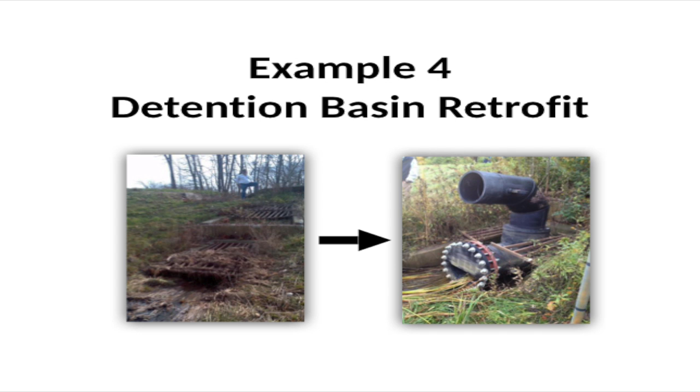So EPA got involved because if we can make this work, it's a pretty inexpensive way to optimize the resources that are already in the ground and get a lot better results in our streams rather than building new facilities, right? So what we did is we have a low flow pipe within a restricted outlet, right? So take an 18-inch pipe and make it like an 8-inch opening, and then have this bypass.

And this is the key, right? So you're ponding more water. On the low flows, you're holding back more water, right? But on the high flows, you still want to get access to that 18-inch pipe with that pressure that's built up behind it. So this extra opening here basically allows that water to get out during the extreme events, the 100-year events, and not cause overtopping in the basin, and basically meet the same performance that it was before the retrofit for the big flood control events.

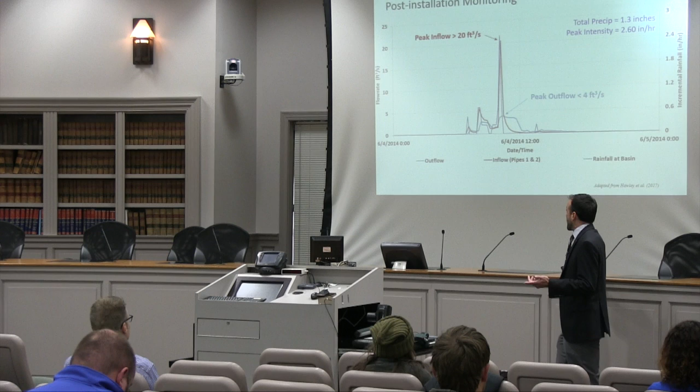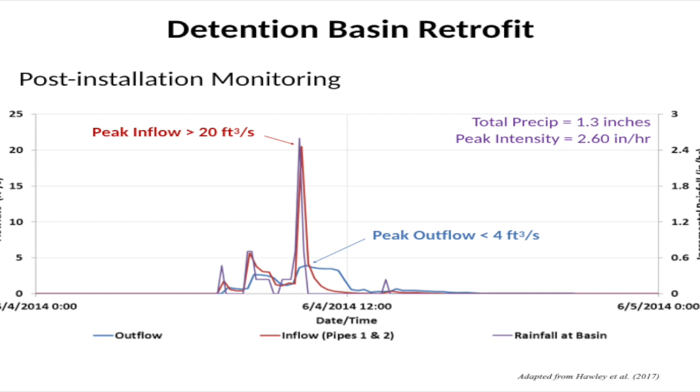So again, EPA was a partner on this, and so they had lots of monitoring on this. So here we have a peak inflow. We have a rain event of 1.3 inches. We have 20 cubic feet per second coming in, and we have only 4 cubic feet per second leaving, right? So that's a huge restriction, and here we are, some pictures, right?

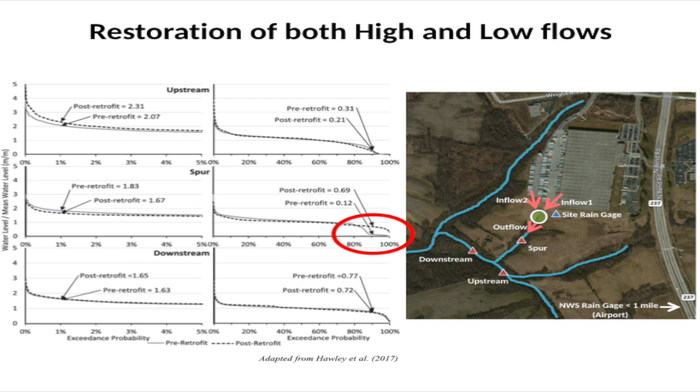But one of the things we were really happy with was at the low flow end, we have a stream that used to go dry about 10% of the time, and now it basically never goes dry after the retrofit. Because we've held that water during the event, saturated the topsoil, and then made it slowly release through the topsoil, we've taken a stream that used to go dry, again, 10% of the time.

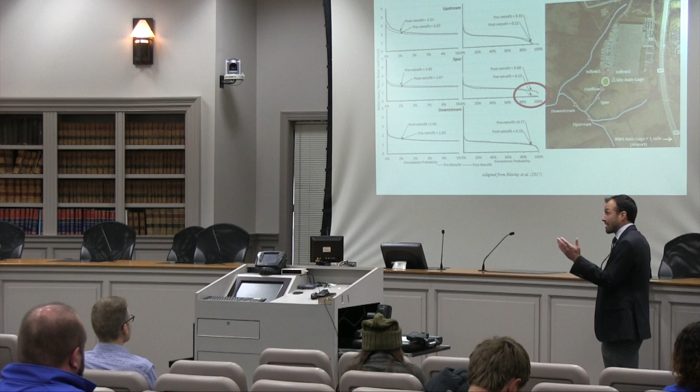If you're going dry 10% of the time, you can't support fish, right? Now we can support fish in this system. So we've got minnows living in these pools downstream of this basin that never used to be there, right? That's a real, tangible benefit to the aquatic resource, right? And this is during September low flows when, you know, the weather is such that you don't expect to see pools wet in an intermittent stream.

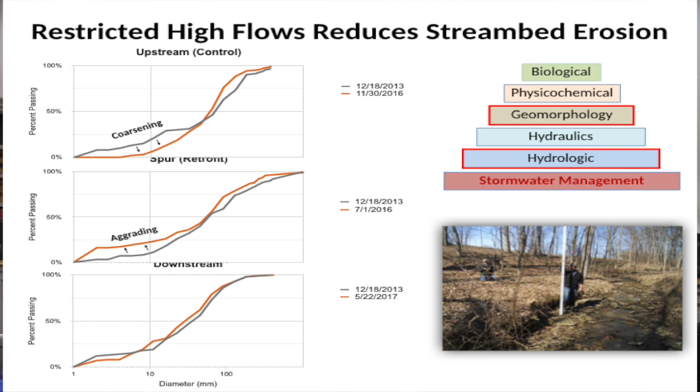Now, in terms of geomorphology, here's the pebble counts, and we see aggrading at our spur site, so the immediate receiving stream. So we're seeing deposition at our experimental site. We're seeing continued coarsening at our upstream control site. So again, the weather got worse, made the flows worse upstream, and we see coarsening at the upstream site, but we're seeing aggrading at the spur site because we're restricting those flows. And downstream site, a little bit of aggradation as well.

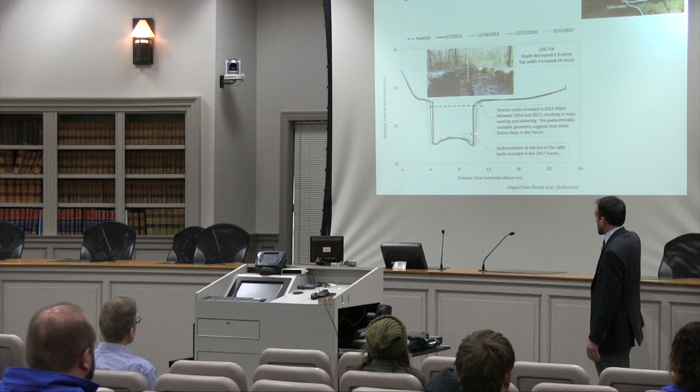If you're going to rate the habitat according to Division of Water's habitat index, it probably went from poor to average, which is a meaningful improvement. That's not just a visual thing. I mean, it's obviously apparent with the picture, but here's the bench that's been colonized by vegetation, that survey in 2017. So here's where that was in 2013, 2014. So bench development and colonization by vegetation.

So the idea is you take a stream like this, you retrofit some detention basins upstream or put in some new controls upstream, and you start to induce deposition at the toe of the bank, right? Eventually that deposition gets colonized by vegetation, right? And not just temporary vegetation like grasses, but permanent vegetation like trees, right? When you start to see that process, you are really changing the trajectory of the stream from continued down cutting and widening to more of a recovered point.

And if you can do that, you've saved a whole lot of money in stream stabilization. We do stream stabilization, stream restoration, but it costs a lot of money to do in-stream bioengineering, putting boulders here, getting new plants established. That is certainly something that's in the toolbox, and you got to do it sometimes to protect infrastructure. But if you can throttle back the flows and address the root cause of the problem, it's much more sustainable for the system and tends to be a lot less expensive.

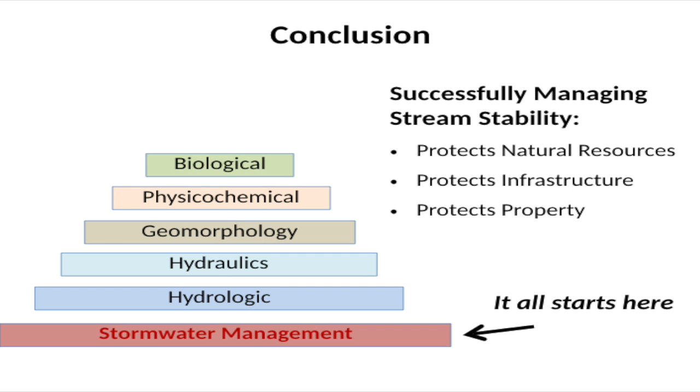Like, since 1992, we've known about this, and not just fringe engineers. This is ASCE, the civil engineering society, and they've known about this for a long time. So let me just do a quick quote from it, so it's not just me saying this on my soapbox here.

Now, I've just spent 2 hours talking about the process and the mechanics of it, but basically we've known it's a problem for a long time. It takes a while to get our policies optimized to make it easier to implement. But I used to teach at UK, and it's kind of surprising when you step back and you're like, man, we've known about this since before you were born, and we're still doing it the way that caused the problem.

So anyway, you can tell why I'm a little passionate about it, but pretty simple way to optimize our investments, protect our streams, and help our stakeholders.

So it was kind of a win-win, and I think it was a success from, look, let's use the local data. It's not just me saying this is what I think. This is real data showing this is what they need and this is what works, right? Yeah, so you can't get rid of that volume. You're not going to magically make it disappear, so let's just make sure we don't cause damages with it.